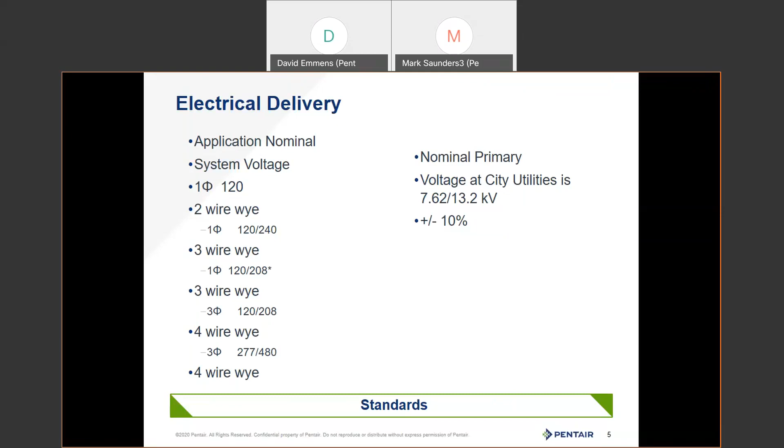Digital electronics, if you're outside this plus or minus 10%, it really causes havoc with control systems. Even though we're going through a transformer and stepping it down, that variance is passed through the transformers as well. So very, very tight control of electricity. Why? Because the devices that it's servicing demand that it be in this plus or minus 10% range. Important to that utility.

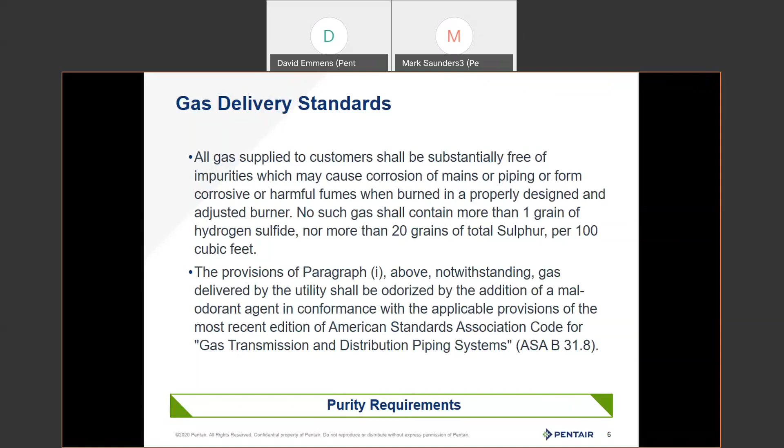Now, natural gas, and this is analogous to a lot of countries around the world. Well, in North America, gas is tested every day for content BTU burn. And then the average BTU burn is averaged out for your bill. The other thing about it is they limit the amount of contaminants that are allowed in it to cause corrosion and pollution. If you have too rich of a gas or too lean of a gas, it creates combustion issues. And that can lead to sooting and potentially fire hazards with propane or natural gas, doesn't matter which. They all have impurities in them.

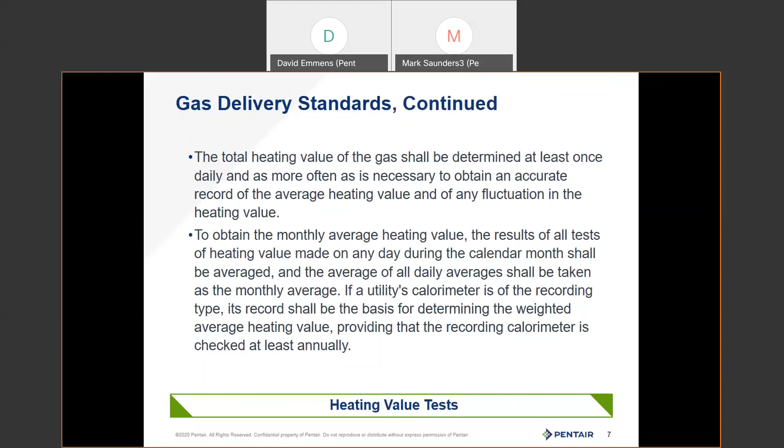And this is really critical, that they're monitoring this every day and submitting testing and tracking this every day. Every time they get a new batch of gas in or the pipelines change supply, they count and average this all day long. So you get a recorded monthly average of your BTU burn based on the number of therms you use, to get your gas rating. We always want to see this lovely bright blue flame when we burn natural gases. Any other colors means we've got a combustion issue. So it's critical for those appliances.

If this doesn't burn properly, people get hurt, whether it's from carbon monoxide or carbon dioxide being put off into a room, or sooting and potential fire hazard. So life and limb depend upon this.

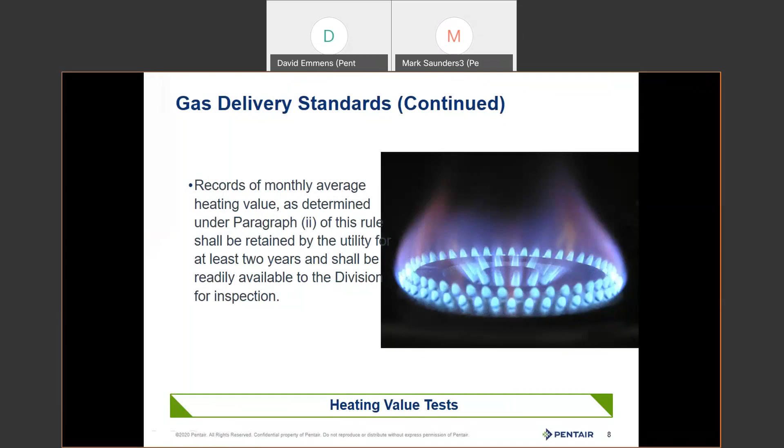Now, when it comes to water, water is managed in a very, very different way. Water in the United States and for all of North America, for that matter, is managed from the perspective that water shouldn't harm you today, and it really shouldn't cause you any health concerns after 20 years of consuming that supply. That's a really, really big target to hit, very easy target to hit. So without doing a whole lot to water, we can get into that target rather easily.

Water is only managed around one use, one purpose only, and that's drinking water. What's coming into the building has to be suitable to drink. And typically, this is about what goes into the pipes at the water treatment plant.

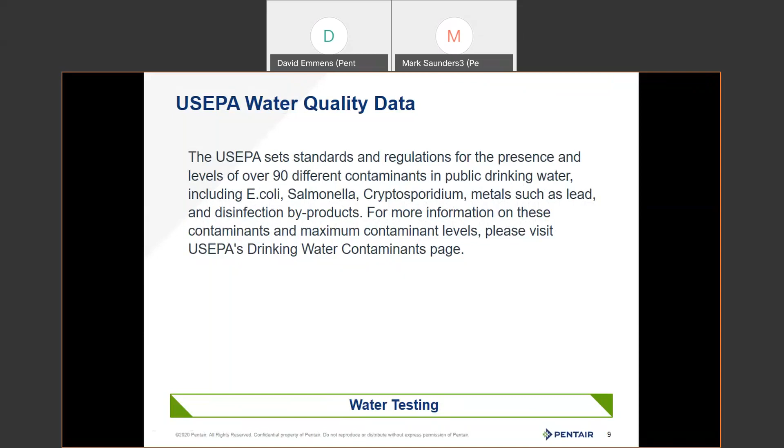One being consumed or overly added, which does happen in municipal treatment situations when they're shocking the system after they do road work or whatever, if there's some sort of issue. And it's a water additive that's designed for the purpose of controlling microbes or destroying biological life. Wonderful trade-off here versus getting cholera and dysentery and waterborne diseases from an untreated water supply. But what you're trading for is a slight increase in the risks of cancers.

Strong oxidizers, especially halogenated oxidizers, tend to result in byproducts of oxidation that are potentially carcinogenic. But in reality, I would much rather take that risk long term than be exposed to waterborne diseases that could kill you today. Up until the turn of the last century, there were cholera outbreaks in Chicago, Illinois every summer because we were using Lake Michigan as a sewer as well as our source of water. And that was a very bad thing to do, killed lots of people.

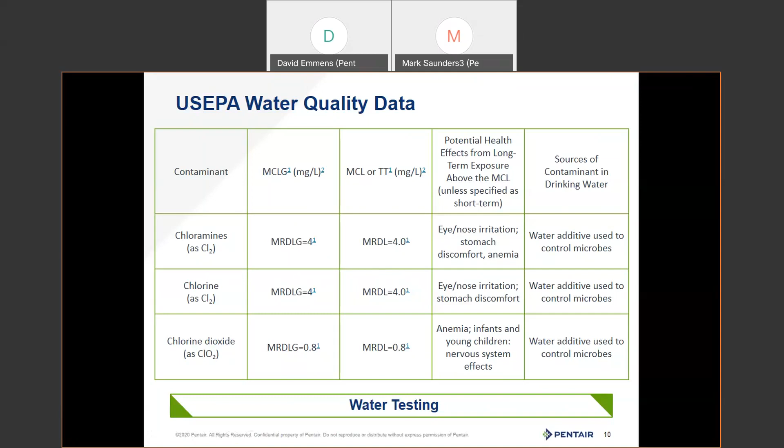So what is this standard really about? This is about health concerns only, and the primary standard here is centered around health effects. But there is a secondary standard that doesn't carry any weight of law. This is where you're going to have equipment effects and some minor health effects.

Like sulfate. You have more than 250 milligrams per liter of sulfate in the water. If you're not born and raised on that water, that is essentially milk of magnesia or magnesium sulfate, and that acts as a laxative. So that's one of the reasons why you may have stomach issues traveling and drinking local water supplies, if they have high levels of sulfate in the water. May not be anything biological.

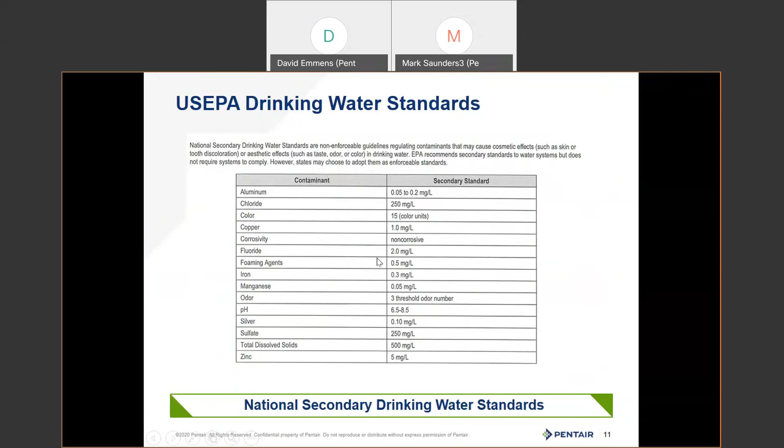Chloride at 250 milligrams per liter, it's fine for your stomach, but really awful for stainless steel water-using equipment. Very few pieces of cooking equipment that elevate temperature could survive 250 ppm of chloride. So the government is not managing your water for any other purpose than getting a drink. That's it.

So here are the secondary standards, and these are all about aesthetic effects. They don't include the potential health effects of the secondary standard. Like aluminum. Aluminum has been linked indirectly to aggravating Parkinson's and Alzheimer's, but it's still used in water treatment as a coagulant. Side effect of this is colored water. Chloride, salty taste. Notice there's nothing about 'may damage equipment.'

Color, 15 color units. That's a severely colored water. Color units above 3 are going to show up visibly, but 15 color units are acceptable. So that's where you get yellow and brown water out of the tap and they say it's safe. I still don't want to drink it.

You have fluoride, and that's an ongoing debate in many circles, how beneficial fluoride is. Above 2 milligrams per liter, it's really not a good thing. And that causes tooth discoloration and accelerated osteoporosis. It's one of the reasons some people want to remove fluoride from their drinking water.

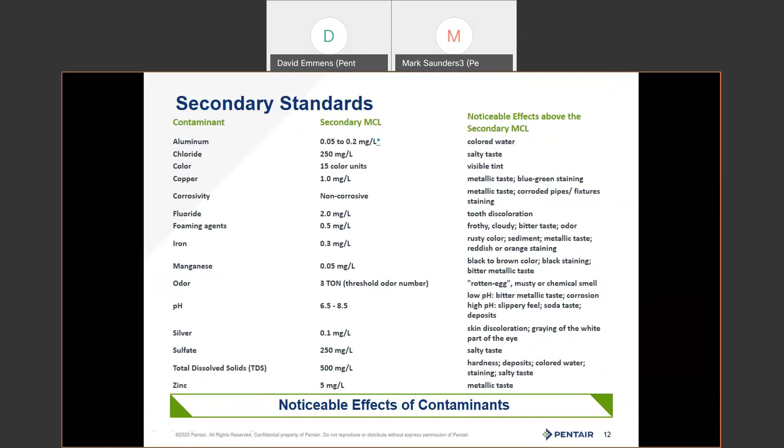Things like sulfate, salty taste, no mention that at that level it's a laxative effect. So this is taken directly from our EPA's standards. So this is what's reported. So there's more effects here than just what is published. My favorite part of this standard is things like taste, not abnormal.

Odor, not abnormal. There are signs in parts of the southern United States and around the country where you may find placards at hotels that say the yellow color of this water is normal and it is safe to drink. That doesn't really give us a whole lot of warm, fuzzy feelings about the safety of that water when it comes out of the tap colored.

So very, very relative standard here about what is normal. But you notice the vast majority of these things are bacterial, heavy metals. This is really a health-centered standard, not necessarily on appearance or aesthetics either, mainly focused on health.

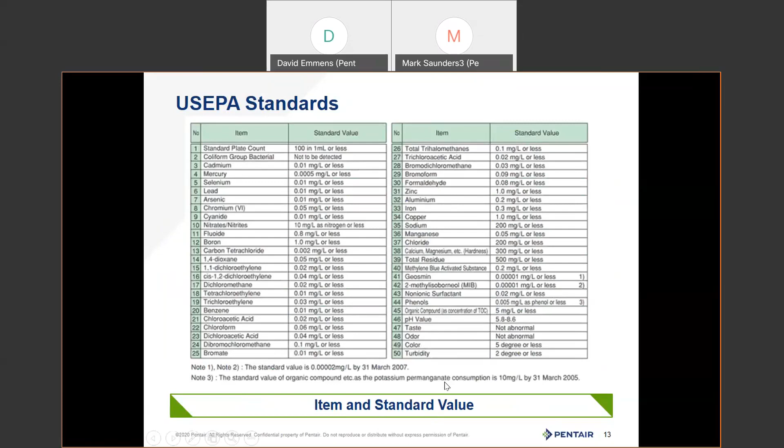So there are presently 90 contaminants on the Safe Drinking Water Act in North America, and these are analogous around the world. So if you want to web search the standards for your communities, your cities, and your countries to make sure your water is in compliance, you'll find a lot of similar legislation throughout the world. In North America, we have a waiting list of 2,600 substances to be included on this list. It's decided by a panel, and then to determine whether or not it's cost effective to regulate that contaminant.

We're seeing that with things like PFAS, PFOAs now in North America, where we develop the ability to test it, but there's no standards now around it. So it's going to go into that standard development phase, which takes years to get through, and then takes an act of Congress to enact it in the law. So there's going to be a myriad of substances that are never going to be tested for.

That's the takeaway of this: there's possibly things in your treated city water supply that you aren't going to want to consume, from the sanitizer down to any number of a myriad of other substances that are never going to be regulated because it's not deemed to have a large enough health effect. This also doesn't take into account impacts on your equipment, on your ovens, your washing machines, your dishwashers, your water heaters.

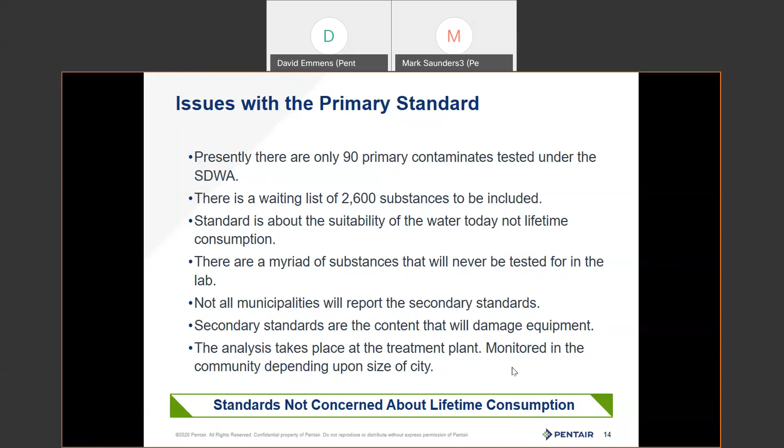And that pipe in the ground, in some parts of North America, is over 100 years old. We still have wooden water mains in use in some of our largest cities that have been collecting dirt and debris since the colonial era of the US. That's amazing that we still have infrastructure that old. We have lots of lead service plumbing in the ground out there that's causing us issues now. Another big issue in North America is removing that lead service plumbing.

So the focus of this act is on aesthetic effects, undesirable tastes and odors, get it down to an "acceptable" level, cosmetic effects that don't damage the body but are still undesirable. And the technical effects that this takes into account are about the water treatment plant and the plumbing in the ground, not about the equipment that's using water.

Once a contaminant is below that maximum contaminant level, it's considered safe. So if we've got some arsenic in our water, but it's below the standard, it's considered safe. Well, I don't want to consume any arsenic, even if my government says it's safe. I want that out of my water supply. So these are about getting stuff low enough that it's not going to harm you today and shouldn't harm you within 20 years. It's that shouldn't harm you in 20 years aspect that we need to manage for ourselves.

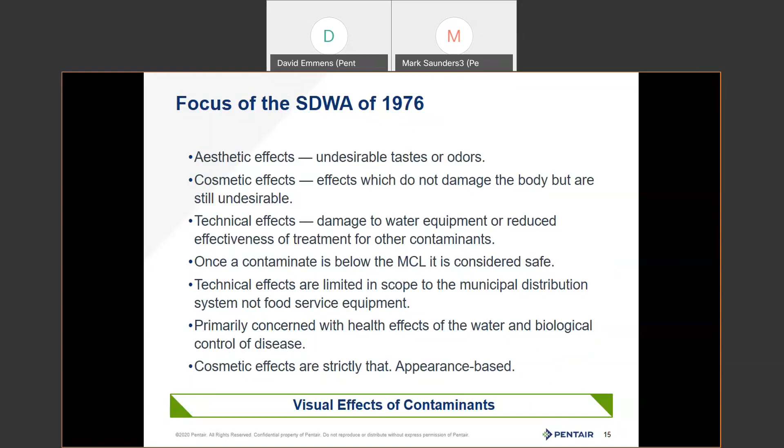Oh, what happened? Sorry about that. That just took a nosedive out of nowhere. I apologize for that. Here we go. Let's get us to where we need to be.